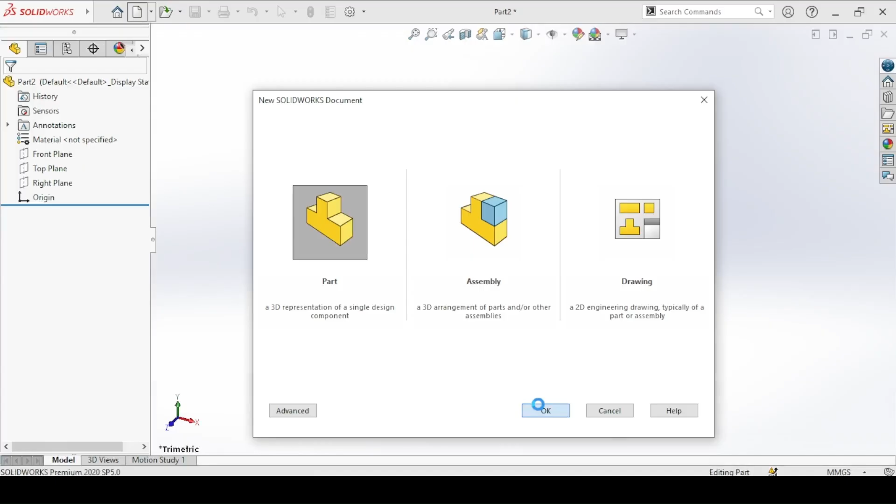Now these dimensions and views are going to guide us in order to model this part. So in the SolidWorks window, click on New, and you're modeling a part, so click on Part and click OK. And this will take us to the modeling window. So this is how we are going to start off.

We are first going to create this middle cylinder here. And then we add these two cylinders, top and below it. And then we cut out the parts that we need, and we'll be done with modeling this coupling. So let's first create the middle cylinder. It's a circle of diameter 70 millimeters, and then you extrude downwards by 20 millimeters.

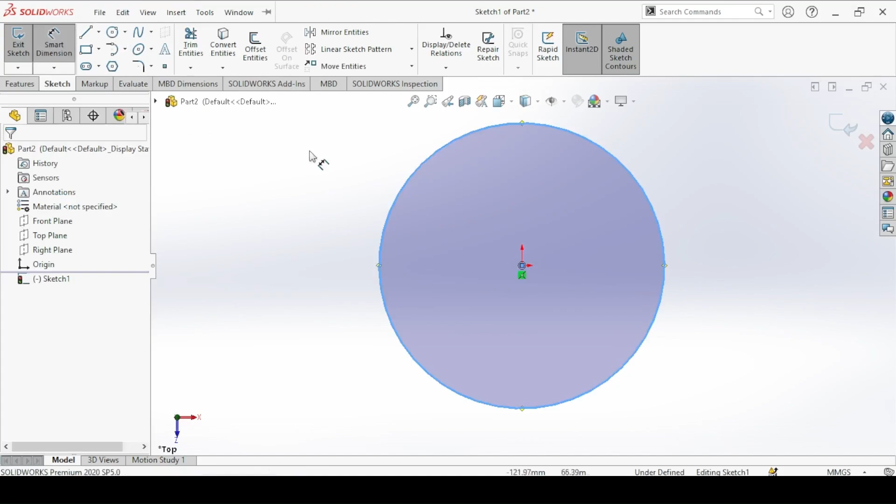So click on the extruded boss/base, and you're going to make the sketch on the top plane. So click on it. Then draw a circle. And the circle should have a diameter of 70 millimeters. And click on exit.

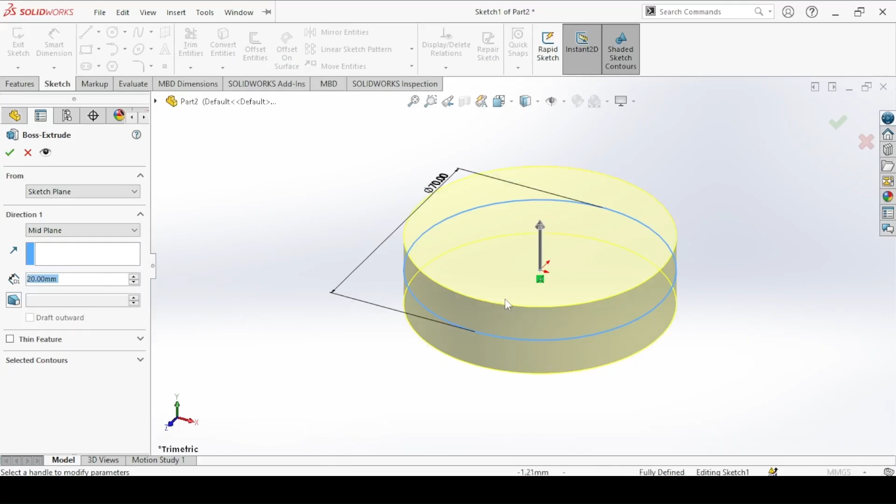So we want to make the cylinder symmetric on every angle. So come to direction 1 and click on mid plane, and you extrude by 20 millimeters. So we extrude 10 millimeters to the top and 10 millimeters to the bottom so that this coupling will be symmetric. So click on it.

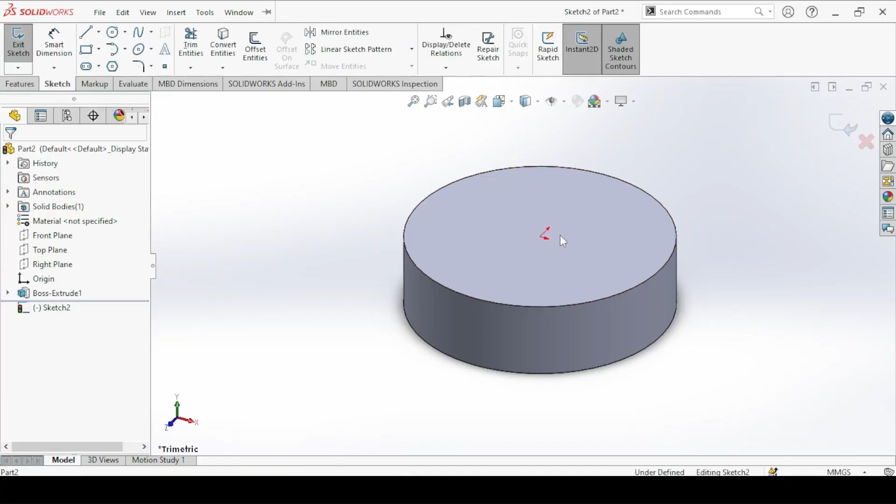Next, you draw the two cylinders on top of it too. The cylinder should have a diameter of 30 millimeters and we extrude to a height of 10 millimeters. So again, click on extruded boss/base and click on this face. Now draw a circle of diameter 30 millimeters. Click on exit. You extrude upwards by a distance of 10 millimeters and click OK.

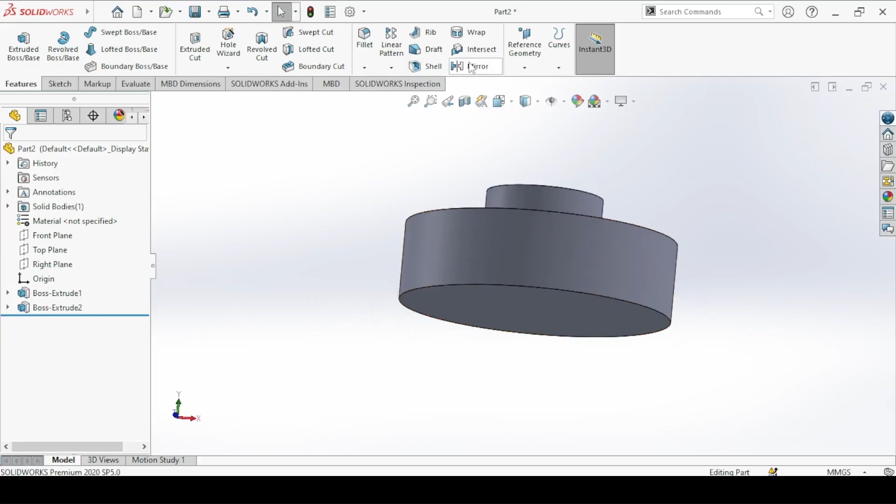Now I want to get the same part down here. So the best thing to do is to mirror it. So click on mirror, and for the mirror face or plane, come to this arrow here, click on it, and the mirror plane should be the top plane. And for the features to mirror, click on this feature here and click OK. So you can see the part has been mirrored to the bottom here.

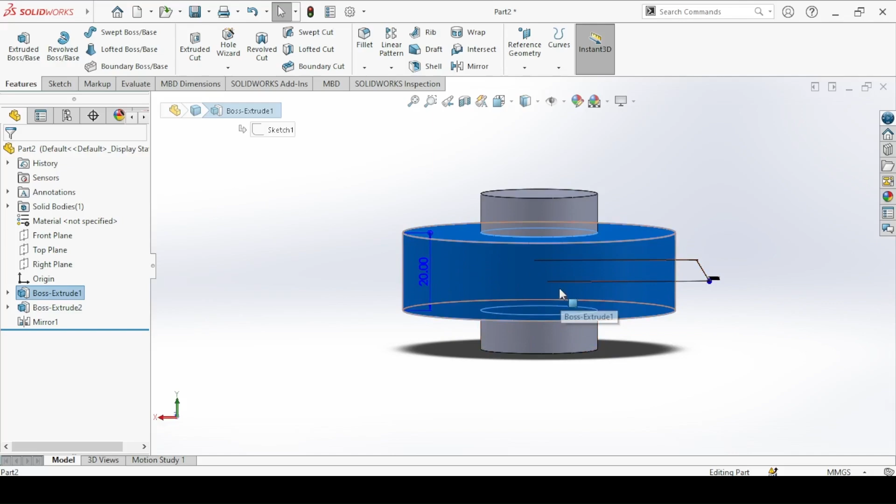And this is why we extruded this middle cylinder using the mid plane method, so that we can mirror exactly over here. Next, we cut inside. The cut should have a diameter of 20 millimeters. So click on the extruded cut and click on this face. We draw a circle of diameter 20 millimeters. Click on exit.

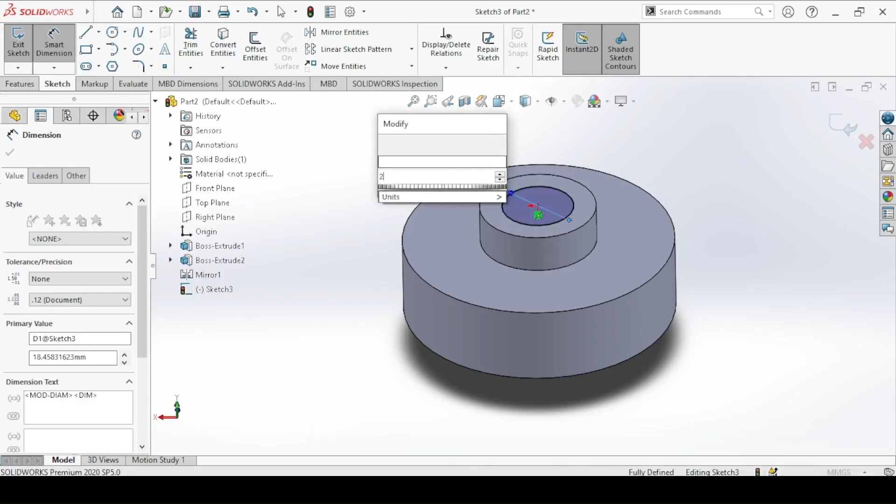Now we are cutting to the last edge here. So come to direction 1, click on through all, and click OK. This is what we have. Next, we are going to make the cuts. We have a guide circle which has a diameter of 55 millimeters. So we first sketch it.

So click on sketch, click on this face. I will draw a circle of diameter 55 millimeters. And click on exit sketch. This will be just a guideline so we can draw the holes and the cuts over here. So let's first make this cut, and this will be a slot.

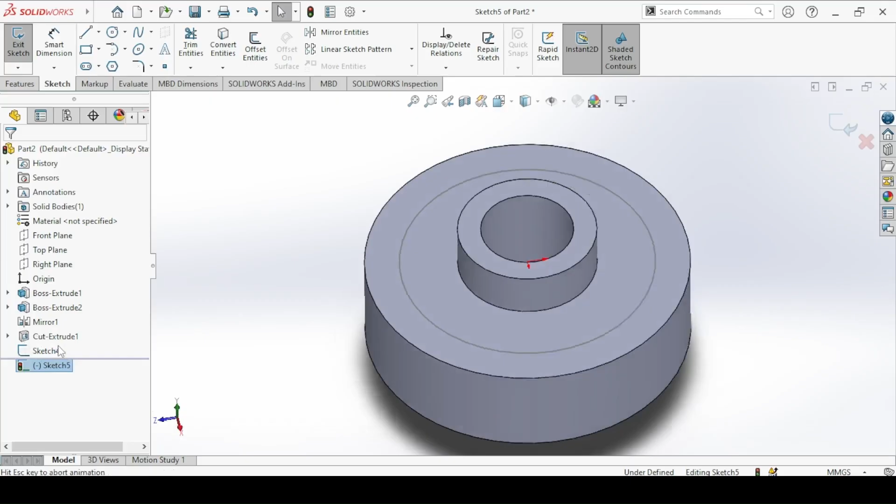So make sure this sketch is not selected, click on extruded cut, and click on this face. Now you have to make it normal to our face so we can see it well and sketch the slot. So click on this sketch here. There will be a pop-up menu; click on normal to. We use the straight slot feature here.

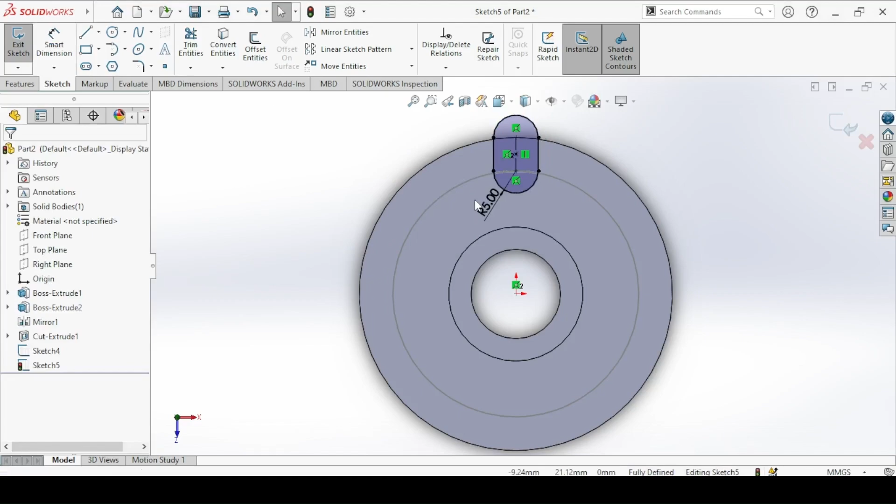The vertical line inside the slot starts from the circumference of the outer circle to the circumference of the guide circle inside here. So locate this point here, click on it, make a straight line here, and draw the slot. The slot should have a diameter of 10, hence a radius of 5. So we dimension the radius of this arc here as 5 millimeters. Now the sketch is fully defined. Click on Exit Sketch.

We're extruding to the last end here, so direction 1 should be up to next, and click OK. We have to get the same slot on 3 different sides, so there can be 4 slots. So the best thing to do is to pattern it, and we use a circular pattern feature.

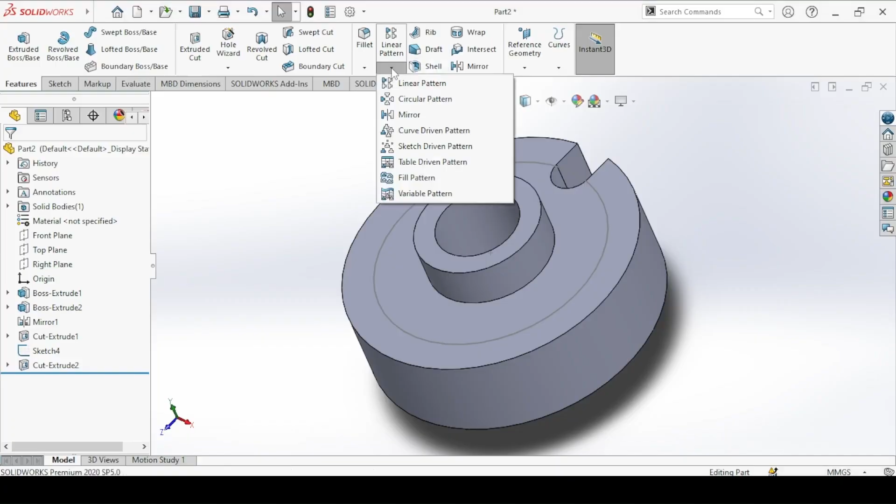For the features to pattern, rotate the model, and click on this extrude cut. The direction to pattern should be the outer circle here. Click on it and make sure that you have 4 parts in total. And the angle of patterning should be 360 degrees, and click OK.

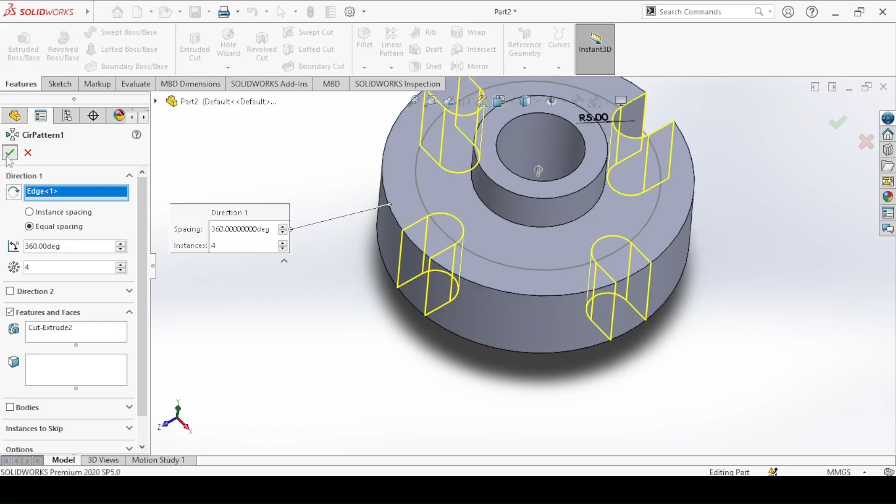The last thing we are going to do is to cut these 4 circles also. In a similar way, we draw 1 circle and pattern it so we can have 4 circles in total. So again, click on the extruded cut and click on this face, and then we make it normal to our face. We are going to sketch this hole here. With the circle tool, on the circumference of the guide circle, draw a circle. The diameter of the circle should be 10. So all 4 of them are 10 millimeters.

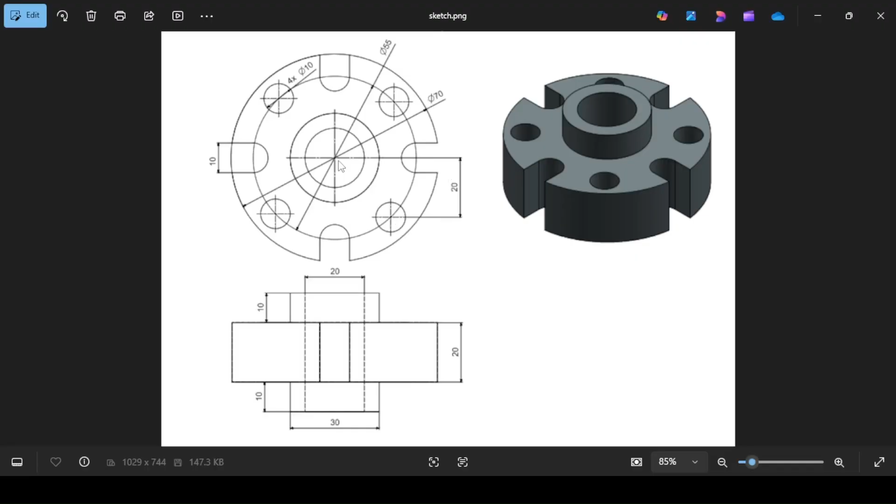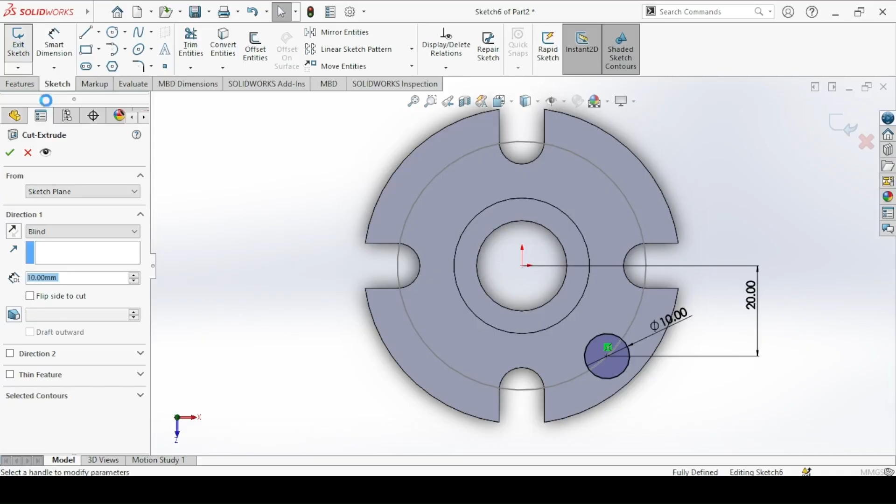We have to make sure that the midpoint of this circle is at a distance of 20 millimeters from the midpoint of the outer circle here. So again, with the smart dimension, click on this point, and the vertical dimension should be 20 millimeters. Our sketch is fully defined, so click on Exit Sketch. And then again, we're extruding through, so make sure the direction is set to up to next and click OK.

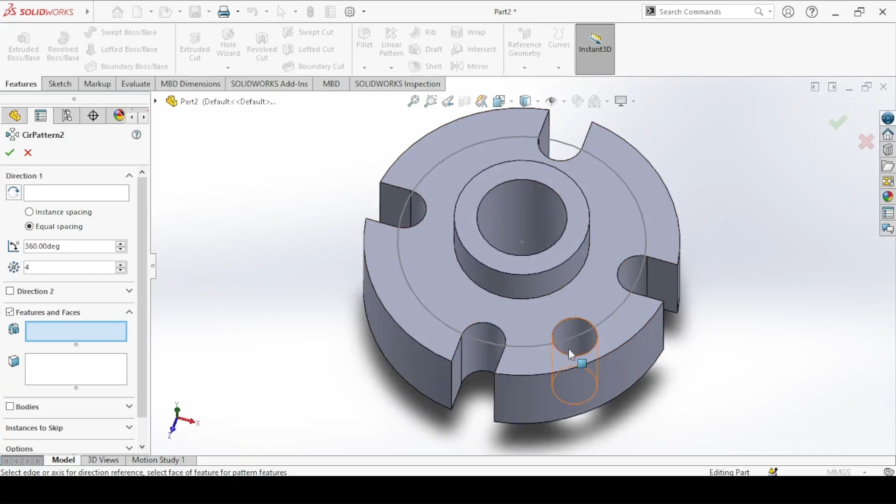Now we have to pattern it 3 additional times. So click on the circular pattern again, and for the feature to pattern, click on this hole. We are patterning so that we have 4 holes in total with a pattern angle of 360 degrees. For the direction of patterning, click on this arc here and click OK.

Now give it an isometric view. And then you can hide this guide circle. We don't need it. Click on it and hide. And yeah, that's how to model this mechanical coupling using SolidWorks.